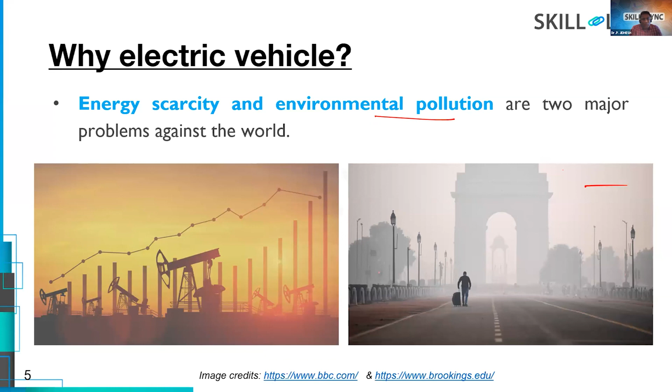But of course, if we want to reduce environmental pollution, we have to switch from non-renewable to renewable sectors by using wind power stations or solar power stations, so that we can reduce environmental pollution. This is a step-by-step procedure. First, we are switching to electric vehicles, and maybe in future everyone will use solar panels for power production.

Now these are the basic major components of the electric vehicle. You can see there is an electric motor, a motor drive, and battery converter. Basically, we use AC power to charge the battery, which needs to be converted to DC power. We have an onboard charger and an auxiliary battery to start the engine, and some transmission from battery to the electric motor. And the major thing is the battery bank.

This battery bank is the heart of the electric vehicle, which consists of almost 30% of the weight of the total vehicle, or even 30% of the whole size, even for two-wheelers or four-wheelers. So battery is the heart of the electric vehicles. Not only in electric vehicles, we also use this battery bank in hybrid electric vehicles, where we have both engines and the battery bank.

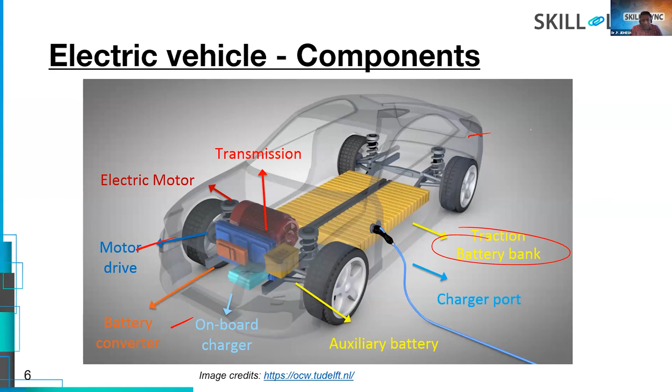Since the battery is the heart of the electric vehicle, now we are going to discuss about batteries. There are different types of batteries available in the market. Previously we used solid state batteries. Nowadays we use lead acid batteries, nickel cadmium, nickel metal hydride batteries, lithium ion, and plastic lithium ion. Nowadays we also have lithium metal batteries, which are unsafe - they can lead to explosion some days, and they don't have very good rechargeability. So in most cases, we are using lithium ion batteries.

There are also a lot of batteries like lithium ferrophosphate, and a lot of batteries under research like aluminum, zinc, and tungsten materials. A lot of batteries are in progress in research, so maybe in future we'll get a lot of new batteries, but now we are using lithium ion batteries in every electric vehicle, not only two-wheelers but also four-wheelers.

If you compare from this graph, the X scale shows the energy density in terms of watt hours per kilogram, which defines lighter weight. The vertical scale denotes the energy density in watt hours per liter, which decides smaller size. If you take the example of lithium, it is lighter in weight and smaller in size compared to other batteries. So lithium ion batteries are the most commonly used batteries in electric vehicles.

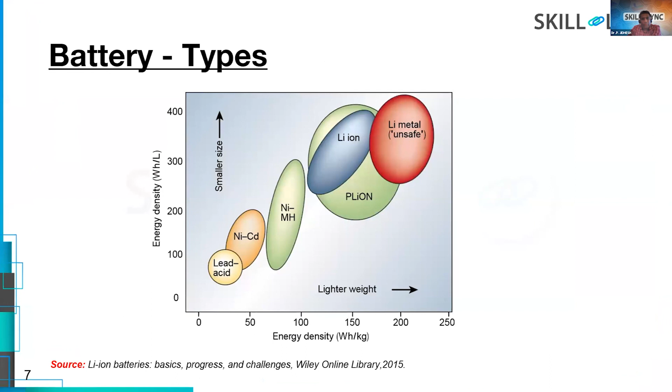So here, on the right hand side, you can see the cut sectional view of the cylindrical batteries. Cylindrical batteries are the most commonly used batteries, and in addition to cylindrical batteries, we have a lot of different shaped structures, like prismatic batteries, coin-shaped batteries, and pouch type batteries which are used in mobile phones. Based on the applications, we have different structures like cylindrical, prismatic, pouch, and coin-based batteries.

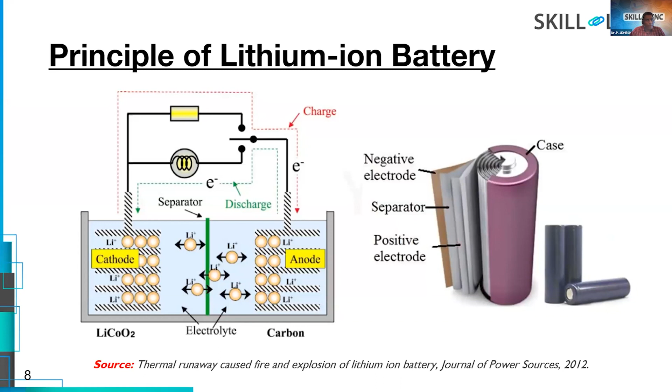Now let us see what is cell, module, and pack. In the electric vehicle, we have the battery pack systems. So what does this mean by battery pack systems? This is called a cell, the single unit device which stores energy in the form of chemical energy and delivers it in the form of electrical energy.

A collection of cells is called a module, where cells may be connected in series or parallel, or both series and parallel. Then what is the pack? A collection of modules is called the battery pack system. These battery pack systems are commonly used in electric vehicles, like 2-wheelers or 4-wheelers. So to summarize: a collection of cells is called a module, and a collection of modules is called a battery pack system.

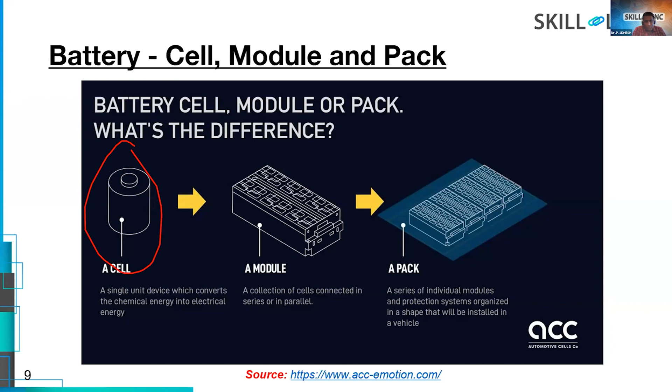Now let us see batteries connected in series and parallel. Here we can see batteries connected in series and in parallel. So basically, batteries are connected in both series and parallel configurations.

When batteries are connected in series connection, the voltage gets multiplied. Here, 3 batteries are connected in series, each having a specification of 3.4 AH, which is called amp-hour, or 3400 milliamp-hours, and a voltage of 4.2 volts. When connected in series, the voltage gets multiplied, so here 4.2 into 3 equals 12.6 volts, with an amp rating of 3.4 amp-hour.

On the right hand side, you can see batteries connected in parallel, which means the amp ratings get multiplied. Here, 6 batteries are connected in parallel, so 3.4 AH multiplied by 6 is almost 20.4 AH or 20,400 mAh, where mAh means milliamp-hour. So this total battery pack system has a specification of 4.2 volts and 20,400 mAh.

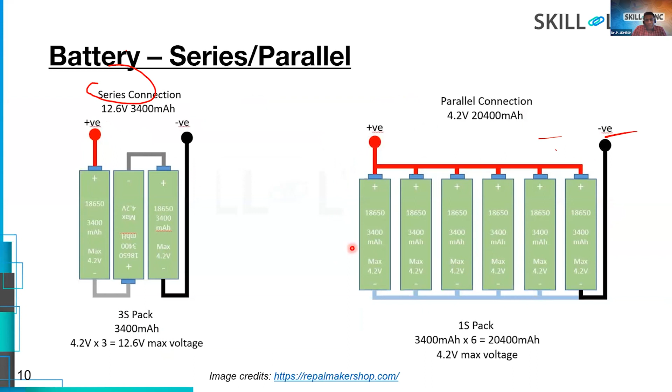So here you can see batteries connected both in parallel and series. In the previous case, this was called a parallel connection with 6 batteries connected in parallel. Here it's 6 cross 3 - 6 batteries connected in parallel forming a single module, and this module is connected in series, 3 in series.

So basically the voltage is multiplied 3 times and the amp rating is multiplied 6 times, giving a total specification of 12.6 volts and 20.4 amp hours or 20,400 milliamp hours. This is how battery pack systems are connected in both series and parallel based on the load application. For 2-wheelers and 4-wheelers, the load will be max more than 12.6, sometimes 36 volts or 42 volts. So based on that, you have to connect the batteries in both parallel and series. Not only are cylindrical batteries used, but prismatic types of batteries are also used in electric vehicles.

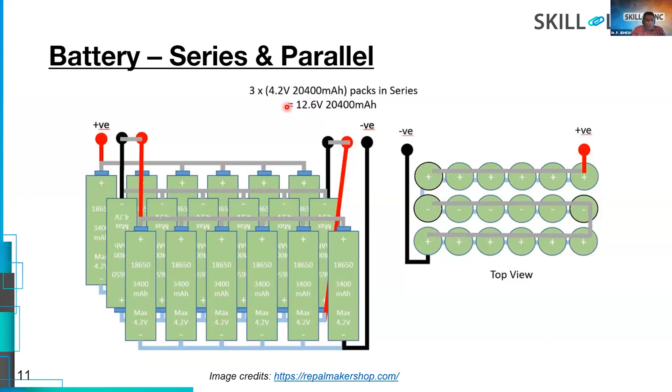Before moving to the BMS system, let us see what is the C rating. The C rating is very, very important. The C rating is nothing but a capacity. It is a unit declared current value which is used for estimating and designating the expected effective time of a battery under variable charging and discharging ratings. Basically, the charging or discharging rate is specified by C, which is called the C rate.

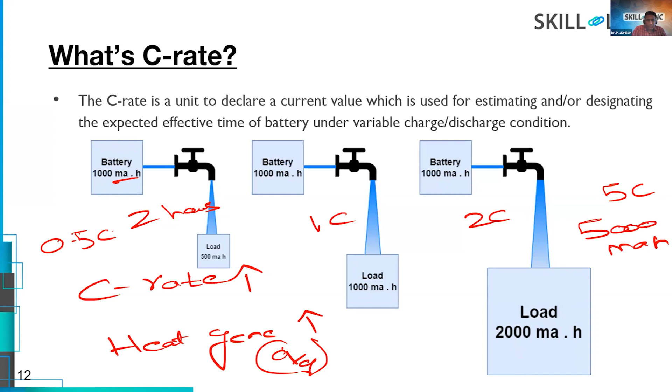Now let us see what is thermal runaway. In an earlier slide, we saw an electric scooter catching fire because of thermal runaway. The term thermal runaway is a condition in which a battery catches fire due to rapid heat propagation, due to rapid heat generation from one damaged cell to another cell. A battery pack consists of many batteries connected in both series and parallel. When thermal propagation happens in one battery, it also affects the neighboring batteries, transferring heat to them. So the thermal propagation keeps increasing, and finally the total battery pack system catches fire.

The desirable operating temperature for batteries is around 15 to 35 degrees Celsius. But as the C rate increases, that means the amount of power that I'm sending is increasing. So we know that if the C rating keeps increasing, that means I am transferring more power. More power means more resistance, and more resistance means more electrons are flowing.

So more the internal resistance, more the heat transfer. This leads to more heat transfer. So in the previous slide, we discussed C rating. So when using a higher C rating, more heat will be transferred and more heat will be generated inside the batteries.

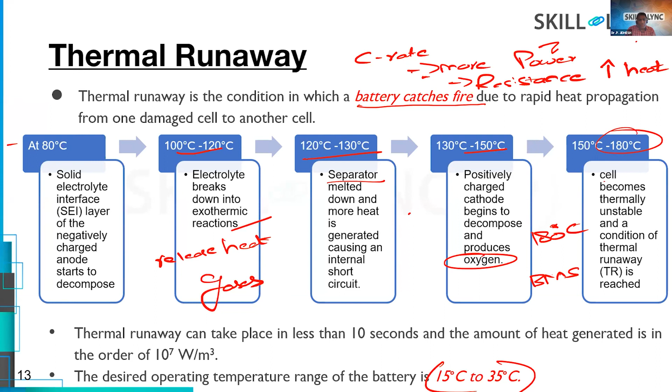This thermal runaway can take place within 10 seconds. Within 10 seconds, this heat propagation may start based on the load and battery behavior during charging and discharging. In this case, the amount of heat generated will be in the order of 10 power 7 watts per meter cube.

The desired operating temperature range of the battery is 15 to 35 degrees Celsius. Even in cold climate conditions, we have to heat this battery to attain 15 to 35 degrees Celsius. We need some mechanism to heat the batteries in cold climates, where the battery might reach 0 or minus 10 degrees Celsius. In such cases, we have to heat the battery using mechanisms like thermoelectric heaters or heating coils.

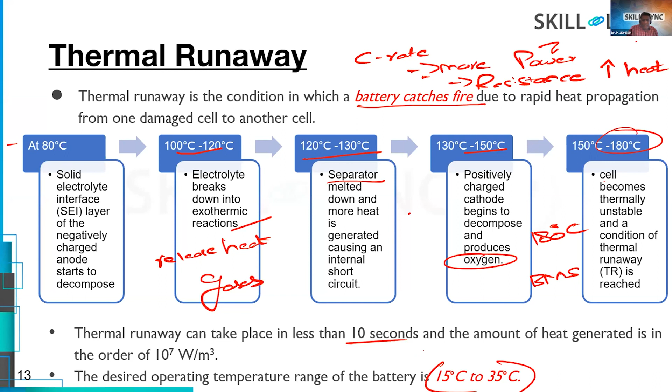This is the main reason and process of thermal runaway. When a system reaches the thermal runaway condition, a battery catches fire, so the total electric scooter gets fired because of thermal runaway. Improper heat distribution, more heat propagation, and more heat generation lead to thermal runaway. We need some systems to maintain the temperature of the battery, which we're going to discuss in the coming slides.

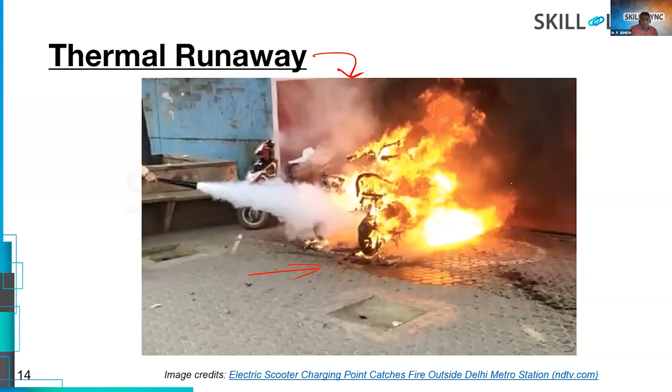Now let us see the battery thermal management system, which is the system that maintains the temperature of the battery. It is recommended that the maximum temperature difference inside the battery pack does not exceed 5 degrees Celsius. That means delta T should be less than or equal to 5 degrees Celsius. So what is the maximum temperature difference between battery to battery? A battery pack consists of a lot of batteries. What is a battery pack?

It consists of a lot of batteries. So the temperature difference between battery to battery should be limited to 5 degrees Celsius.

We know that the battery's thermal temperature varies due to internal heat generation during charging and discharging process. This uneven temperature distribution ages the battery, meaning it reduces the life cycle and also affects the power capacity, which means it affects the cell performance.

It reduces the power capacity due to the internal resistance. So due to internal resistance, it affects the power capacity. So two things: aging of batteries and power capacity. It reduces the power capacity of the battery pack systems. So these are the main drawbacks of the battery.

It is recommended that the maximum temperature difference inside the battery pack should not exceed 5 degrees Celsius. So to maintain temperature, there is a system called the battery thermal management system, which is necessary to maintain the battery temperature in the desired range. It plays a major role in the battery pack life and its overall performance. So we need this system to maintain the temperature of the batteries.

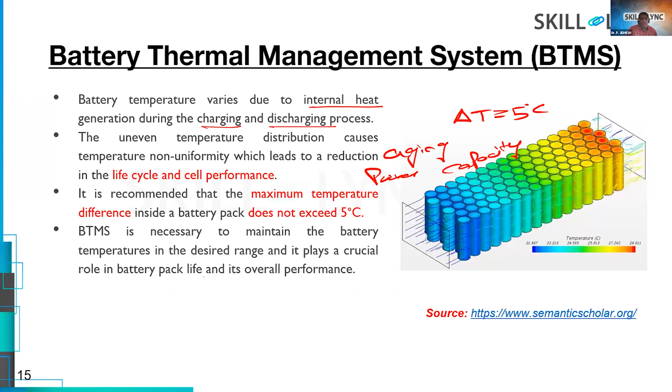Now let us see the different types of battery thermal management systems used right now. There are different media used for cooling the battery: one is air and the other is liquid.

We know that liquid has very good thermal conductivity compared to air, but handling of air is a little bit easy and it is less in weight compared to liquid. So most engines use air cooling mechanism, but with liquid cooling, the heat transfer is very efficient compared to air, because liquid has very good thermal properties like thermal conductivity.

In air cooling, we can basically classify it into natural convection and forced convection. I hope you guys know natural convection and forced convection, you might have studied this in your bachelor's course in heat and mass transfer or heat transfer.

Based on different optimization techniques like type of battery layout and airflow channel arrangement, we decide which one should be inlet and which one should be outlet. We have to create a duct-like structure, and there are various optimization techniques like spacing between the batteries, parameters like velocity, type of air, flow rate, flow arrangements, and space between batteries. There are a lot of techniques to be optimized, including cooling fan placement.

If it is forced convection, we need some mechanism like a fan, blower, pump, or compressor. We need some mechanism which consumes less power. This is called an active system. When we use natural convection, it is called a passive system.

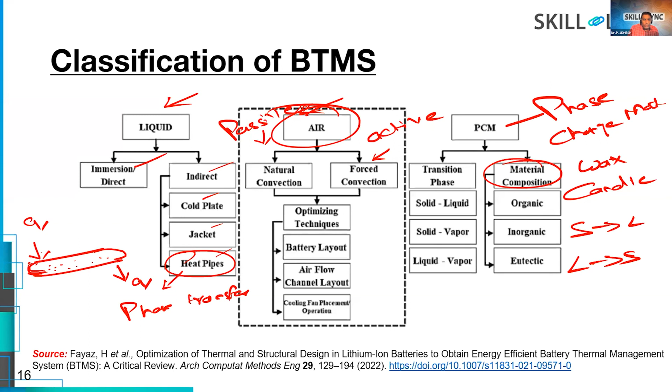Yeah, the processor - forced convection by CPU, very good, exactly Mohit. Forced convection by CPU cooler. So in CPU we are using the fan, which releases the heat from the processor. Yeah, processor is forced convection, exactly. And fins is natural, one with fan is forced. So IC engine is natural, exactly. Yeah great guys, very good observations.

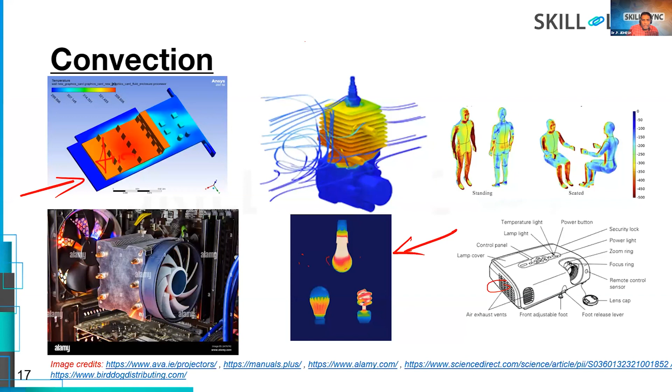Next, let us see. Before moving to the cooling methods, I'm going to recall the simple fundamentals that you have learned in the bachelor's degree, maybe in third year, you have learned the heat transfer subject, which is called Newton's law of cooling. This is called convection law, right? You guys have learned Fourier's law of conduction. For conduction, you might have learned Fourier's law, and for convection, there is a law called Newton's law of cooling.

From Newton's law of cooling, we know Q is equal to H A delta T, where A is the surface area in which heat is transferred, and delta T is the temperature difference between the two surfaces in which it is transferring. H is the important term, called heat transfer coefficient, written as watt per meter square Kelvin. The amount of heat transfer per unit area per unit degree rise is called heat transfer coefficient. We are discussing what is H in coming slides.

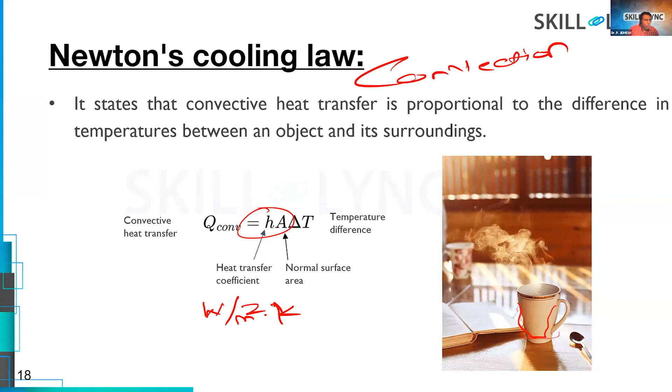Before moving on, going to revise some dimensionless numbers, which are very important in the case of forced convection. One is called Reynolds number, right? We have used this Reynolds number in most subjects like fluid mechanics, heat transfer, gas dynamics. It is nothing but rho U L by mu, where rho is the density of the fluid, U is the velocity of fluid, L is the length of the plate in which fluid is flowing in terms of external flow. In terms of internal flow, it is called D, the diameter of the pipe in which fluid is flowing, and mu is the viscosity of the fluid.

Basically, this rho by mu is nothing but a property relation, which you can also write as U L by nu, where nu is the kinematic viscosity, the ratio between the absolute viscosity to the density of the fluid. The laminar flow is when Reynolds number is less than 2300 in terms of internal flow. For internal flow, Reynolds should be less than 2300, and for external flow, it should be less than 10 power 5.

Similarly for turbulent flow, the Reynolds number should be greater than 4000. In between is called transition flow. For external flow, the turbulent should be more than 5 into 10 power 5. Based on the types of flow, whether internal or external, turbulent or laminar, you might use various correlations available in the data book like Nusselt number correlations.

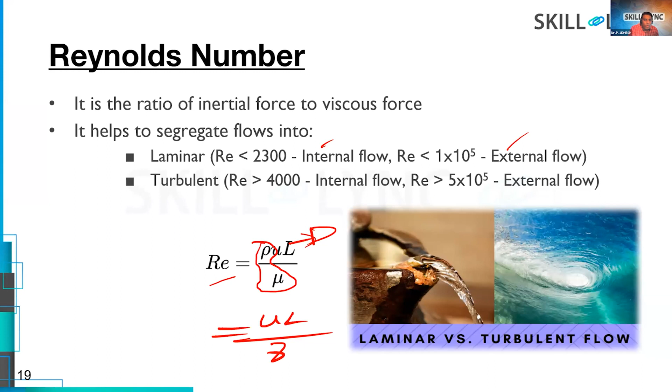So here, let us see what is Nusselt number. Nusselt number is nothing but a ratio between the convection heat transfer to the conductive heat transfer. Mathematically, it is written as H L by K. That is K by L, K by thickness, L by H. When convection heat transfer is dominating, the Nusselt number will be high. When conduction heat transfer is dominating, then Nusselt number will be less.

In most applications, like conjugate heat transfer, we have both conduction as well as convection heat transfer, right? So Nusselt number denotes the increase in heat transfer through a fluid layer, which is called convection, related to the conduction heat transfer.

When a fluid is motionless, there is no motion, meaning there is no bulk motion and no convection heat transfer. So conduction is dominating. In such cases, the Nusselt number will be almost equal to 1.

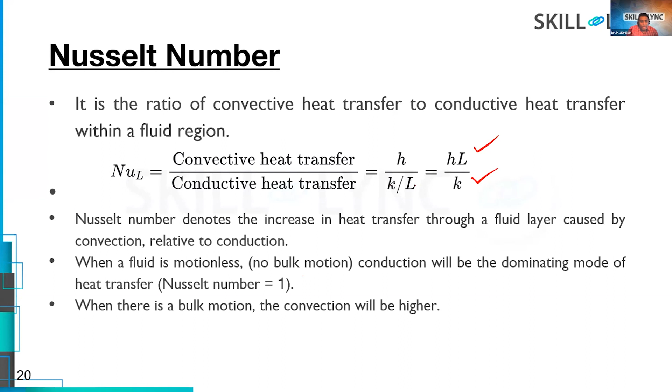When there is bulk motion, when the convection term is dominating, the Nusselt number will be higher than 1. So this Nusselt number correlation is very important.

Now let us see the different types of convection: forced convection and natural convection. If you are using an external device like a pump, blower, or fan, that is called forced convection. Here you can see a hot egg - to cool this egg I'm using a fan, increasing the cooling rate and the heat transfer. This kind of convection is called forced convection.

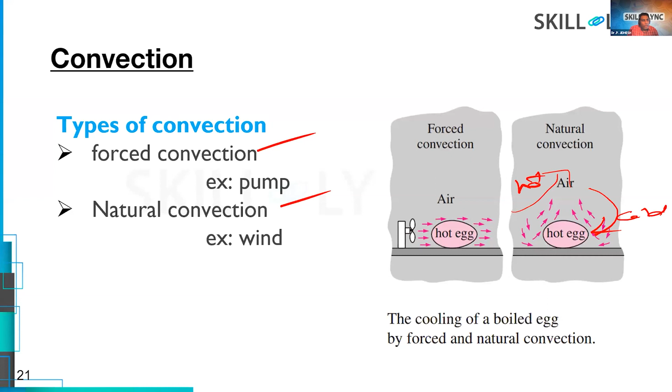But natural convection means the surrounding air in contact with the egg gets heated. This hot air will move upside and cold air will come back, and this cycle repeats. But in this case, the heat transfer rate is less compared to forced convection. So this is the difference between natural and forced convection.

Here I'm going to introduce the main term called the heat transfer coefficient. In convection heat transfer, the heat transfer coefficient is a very important term, and basically it is not a property of fluid.

It is an experimentally determined parameter, and H depends upon variable parameters like surface geometry in which heat is transferred - it may be a plate, pipe, or complex structure - and nature of fluid motion, like velocity, which may be laminar or turbulent. Then properties of fluids - it may be gas, water, ethylene glycol, oil, mercury, whatever it is. The property of fluid plays a major role because different fluids have different viscosity.

Viscosity plays a major role in oil heat transfer, and bulk fluid velocity is a very important term compared to other terms. When velocity increases, the heat transfer coefficient also increases naturally.

So basically the heat transfer coefficient H will be in the range of 2 to 25 in free convection for gases, and for liquids the range will be 10 to 1,000, because liquid has very good thermal properties like thermal conductivity compared to gas, so convection heat transfer will be higher for liquids.

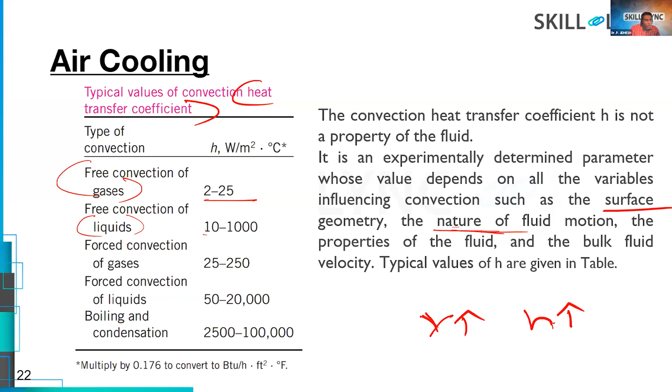Now let us introduce the BTMS techniques. Since there is limited time, I'm going to discuss only air cooling. This is nothing but a battery pack system, shown here from one of the literature sources, with a lot of batteries connected together.

This is the temperature distribution of natural cooling, done by CFD analysis using a tool like ANSYS Fluent. Here you can see the natural convection of heat from the battery to the surroundings, with hot points at the center. The outer circumference of the battery pack has less heat since it's in contact with surrounding air, where convection heat transfer occurs. At the center we have 52 degrees Celsius, while the outer case has 47, so the delta T is almost 5 degrees Celsius.

So this is without the cooling process. Now let us see the temperature distribution with top inlet and bottom outlet, using a duct-like structure. I'm sending air from the top direction and it leaves the duct at the bottom, so the top surface gets cooled.

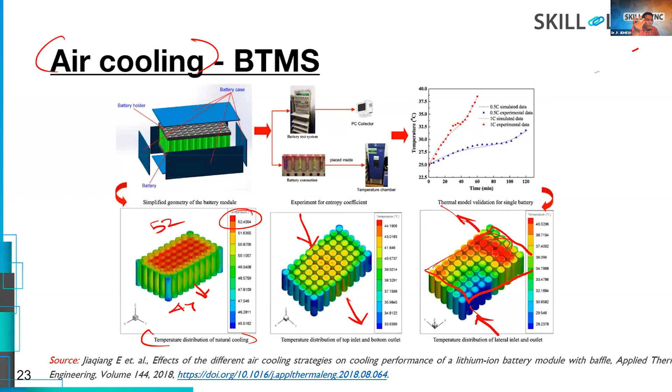This is also one of the case studies where by changing the space between the batteries, you can see there are 3 cases. In the first case there is no space between the batteries, in the second case B, the space between the batteries was maintained at 2mm, and in the third case, the space between batteries was 4mm.

If you compare B and C, even though the spacing between the batteries is high in the third case, you can see a lot of hot points. So you have to optimize the distance between the batteries. You cannot increase the battery spacing, and also you cannot maintain any close contact structure.

So always remember that delta T should always be less than or equal to 5 degrees Celsius. Delta T is the temperature difference between the batteries. In this case, they have used this spacing to study the temperature distributions.

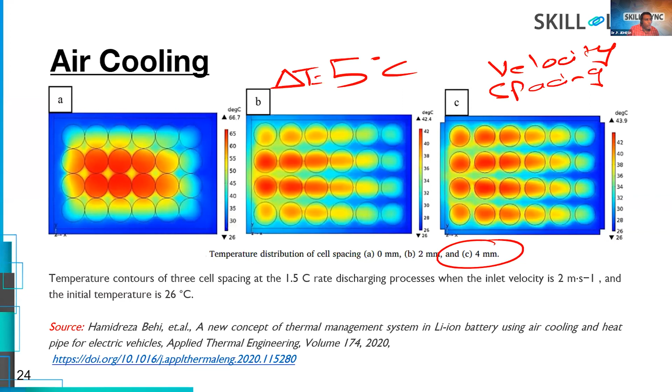Likewise, you can see you can change a lot of parameters, like the velocity, the spacing, or the geometry of the battery pack systems. You can also, instead of air, use some other mechanism where you can use a diffuser.

The inlet might also send air through inserted tubes or pipes between the batteries, and there might be some small holes like diffusers. Likewise, you can change a lot of things using CFD, because CFD has a lot of advantages.

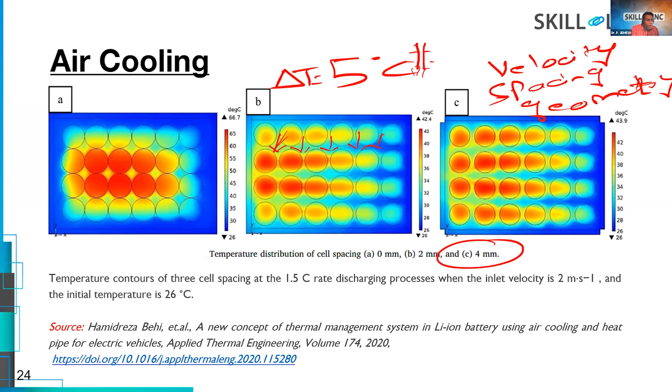Instead of doing experimentation or thermal modeling, you just have to do a simple geometry, which you can analyze using computation on the computer. So CFD is a very important tool in terms of heat transfer or flow analysis.

Now this is a small thing which is done in the Skill-Lync. So this is the animation which is done using the CFD tool in Skill-Lync.

This shows the difference between the battery pack system with cooling and without cooling for 1C charging. On the left hand side video, you can see the battery temperature keeps on increasing without the cooling process. Initially the temperature was around 26.94, and finally the temperature is around 55.17. This is the animation showing the temperature distribution of the battery pack system, which keeps on increasing.

Now what happens if I send the air from the left hand side to the right hand side, with a velocity of 5 meters per second? Even though the temperature of the battery keeps increasing, it is limited to 46 degrees Celsius. By using a velocity of 5 meters per second, I can maintain a temperature of 46. So the difference is 55 minus 46, almost 8 to 9 degrees Celsius difference.

So by changing the velocity, or the spacing between the cells, or by using different flow mechanisms, you can study the temperature distribution of the battery pack systems.

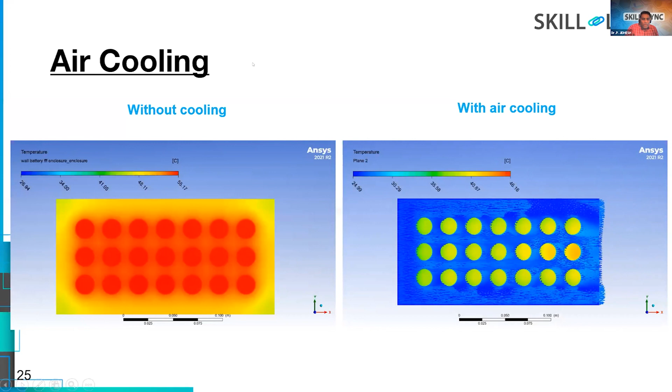Now let us see one of the case studies which was performed using the CFD tool and heat transfer analysis on a heat generating battery using forced convection methods.

Now, here you can see the case study was taken to perform the heat transfer analysis using ANSYS software for the cylindrical battery, with the heat generation boundary condition.

And here we have created an enclosure using air as the working media for cooling the battery pack system. The battery pack we have taken as 7x3 batteries, and the inlet temperature and velocity of air were maintained as 25 and 5 meters per second.

And these are the properties of the battery taken from some literature: the density, specific heat, thermal conductivity, and discharge rate. In this case, we have taken the discharge rate, and for heat generation we have used the simple formula which is called V cross I.

And we have taken the 18650 battery. 18650 is a commonly used battery type. The 18 is with respect to the diameter of the battery and 65 is with respect to the height of the battery.

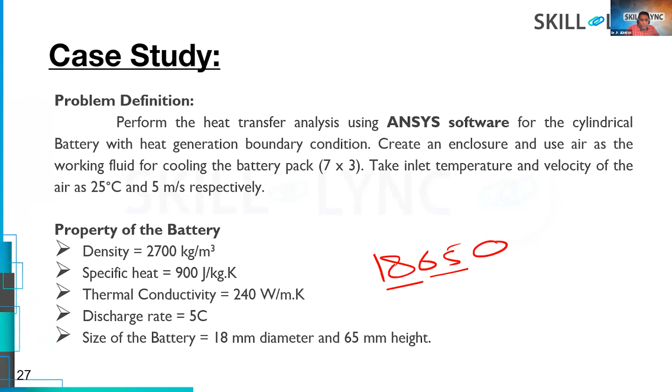Now, basically in CFD there are pre-processing and post-processing. In pre-processing, we are creating the geometry and then discretization. Discretization is nothing but splitting a surface into small surfaces to ease the computer in solving the problem, because the computer won't solve the partial differential equations directly. So we divide the surface into small surfaces in order to convert into linear algebraic equations, which the computer can solve for the given engineering problem.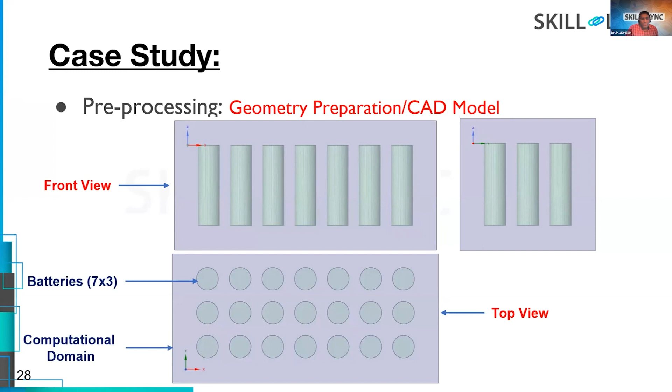And we have to give name selections in the meshing. So we have taken this as the inlet and this as the outlet profile, and we have named this as battery wall. And even if you don't assign a name to the enclosed computational domain, ANSYS Fluent will take it as wall by default. You can go to the setup and check the boundary type.

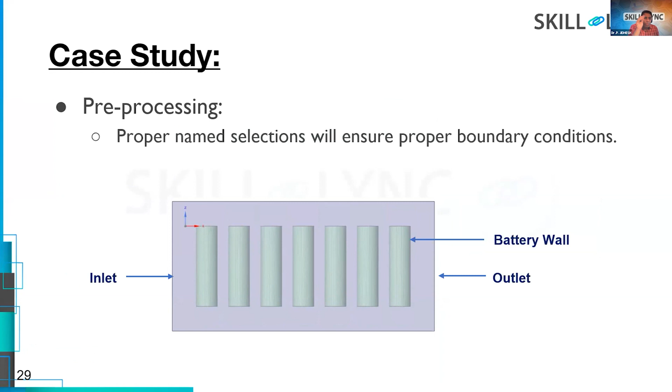Next, in pre-processing, this is called discretization or meshing, to capture the flow separation, prism layers are provided around the battery wall. This is the wall in which heat is transferred between the battery and the fluid media, so we have to create a structure, called the inflation layer, around the battery wall.

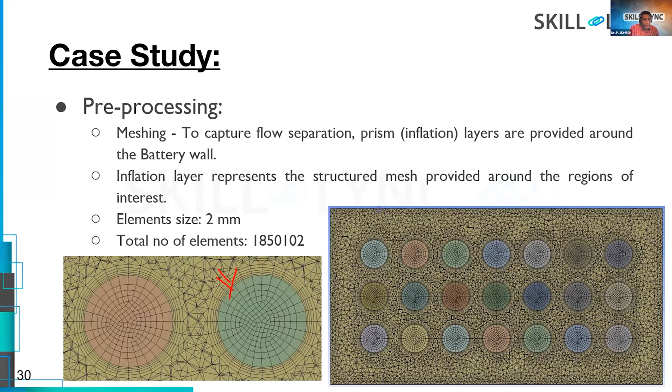Here the element size was maintained at 2 mm, and the type of volume is called tetra CFD, and the total number of elements is around more than 18.5 lakhs. This meshing was performed using the CFD tool only.

Now next, solvers. What are the settings given for the solver? Basically this is a pressure-based solver. We have to decide whether pressure-based or density-based depending on the Mach number, which is nothing but speed of the fluid divided by speed of sound. The type of model is selected based on your experience or knowledge of turbulence modeling, either K-epsilon or other models. And we have switched on the energy equation since heat transfer is involved.

And you have to assign the fluid material. For the computational domain, we have used air, chosen from the Fluent database itself. And we have defined the material for the battery since it is not available in the Fluent database; you have to define a user-defined material like battery, and assign the properties like density, specific heat, thermal conductivity, and so on.

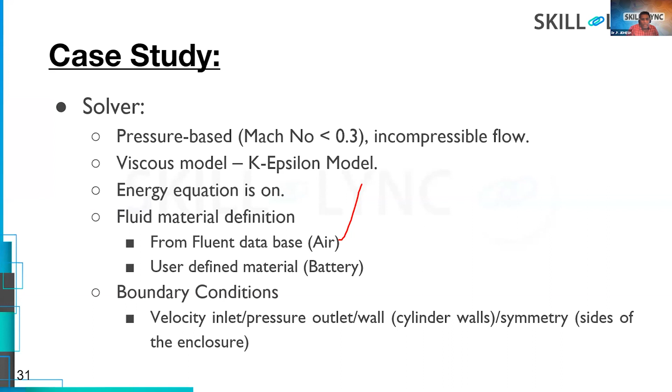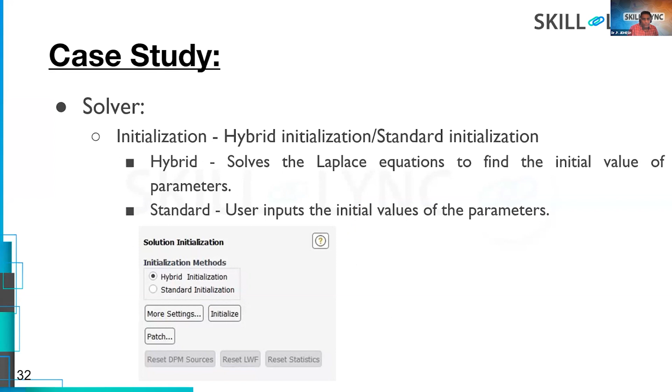For boundary conditions, we have used velocity inlet boundary condition, pressure outlet condition, and wall for the cylindrical walls and the computational domain. Then we have the initialization problem. Basically initialization is like finding the initials, like giving a key to the vehicle, so the user inputs the initial values of the parameters. Next is post-processing, and this is done for the transient analysis with varying step size.

This analysis was done for around 400 seconds of simulation time, but for the end results it takes more than 10 hours. For various steps, it takes more computational time. This computational time depends upon the mesh size as well as the complexity of the engineering problem.

This is the streamline which shows the velocity profile, the velocity streamline. Here, the left side is the inlet condition and this is the outlet. This is the air moving through the body, and here you can see the streamlines and the air getting inside the batteries, getting into the space between the batteries.

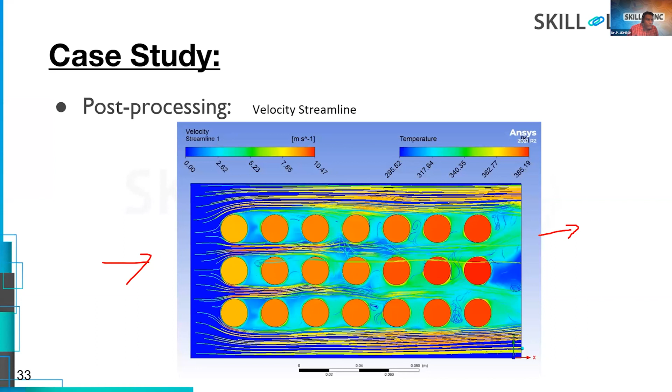This is the cut section view, and here you can see the final temperature contour. Since this is your inlet velocity, and this is your outlet, the velocity was maintained at 5 meters per second.

Here you can see the first battery gets cooled compared to the last battery because the air is moving from left to right hand side, and the inlet temperature of air is maintained at 25 degrees Celsius. So the air which gets in contact with the first battery absorbs heat. When it moves to this side, the air temperature is almost near to 362 Kelvin, so the last battery is not cooled.

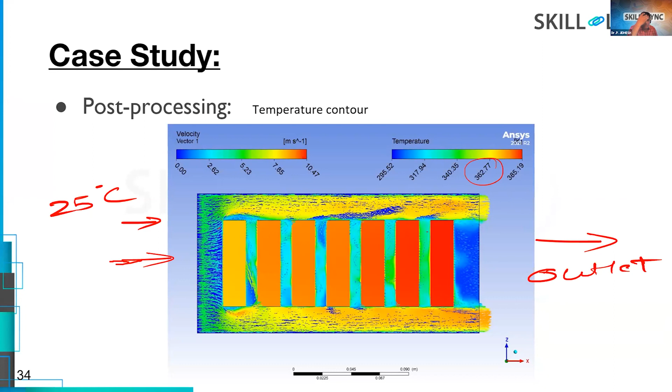By changing the flow parameters like flow patterns, you can do analysis similar to this using CFD tools. This is the cut section view, front view, and here you can see the cut section view of the top view. In a similar manner, you can see the velocity vector and the temperature contour.

The air is moving from the left hand side to right hand side. So this is one of the projects done on Skill-Lync using the CFD tool.

Similar to this, you can do a lot of things for battery cooling techniques, even not using air. You can also use liquid as the coolant. But if you're using liquid as the coolant, you cannot use direct contact with the batteries, it will create a short circuit. So you have to use a cold plate kind of structure to do such analysis. Maybe in future we'll be discussing liquid-based BTMS systems.

This was done for the 5C discharging rate, so you can see more heat is generated. The maximum temperature is nearest to 110 degrees Celsius, because this is for 5C rating with an average velocity of 5 meters per second.

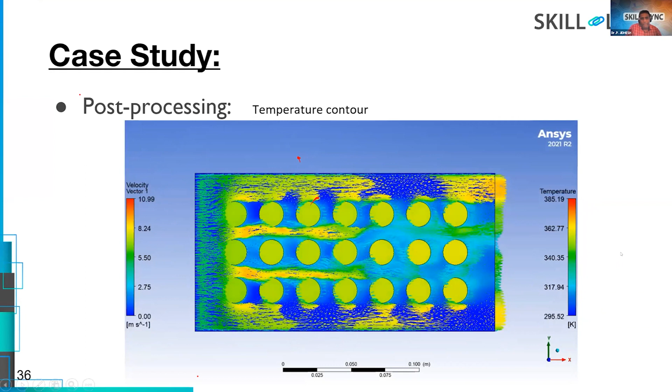Now, similarly, we have done this for a single battery unit with 1C rating. In this case, the air is moving from the right hand side to left hand side, and here you can see the battery temperature keeps on increasing. The maximum temperature of the battery is about 340 Kelvin, with the average velocity maintained at 5 meters per second.

Initially we gave fewer time steps so we could see there is less movement in the temperature. After that we gradually increased the time steps, and now we can see the temperature keeps on increasing. So here we are using air as the working fluid.

I think you're able to see the animation, right? Balaji's animation is visible. Yes sir, it's visible.

Thank you. So you can see the temperature keeps on increasing, the maximum temperature is at 340.38 Kelvin, even after using air as the cooling media at 5 meters per second. So by changing parameters like the temperature of the air, velocity of the air, or type of cooling media, by improving the thermal conductivity of the air - basically the thermal conductivity of air is very low, even air can be used as an insulation material because of very low thermal conductivity.

So instead of using air, we can also use different cooling medias, and we can see similar kind of analysis using software like CFD Fluent. CFD Fluent is one of the tools available in the ANSYS software.